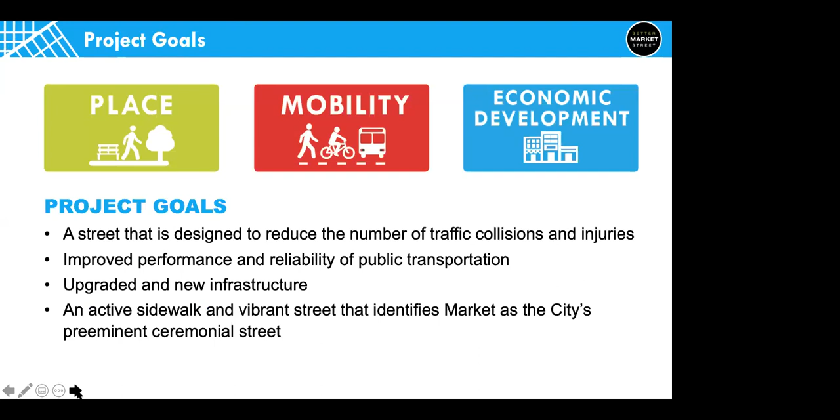Better Market Street is a joint effort between 5 city departments. The San Francisco Public Works is the lead department. Also involved are the San Francisco Municipal Transportation Agency, the San Francisco Public Utilities Commission, Planning Department, and the San Francisco County Transportation Authority. And we work closely with the Mayor's Office on Disability and the Office of Economic and Workforce Development. Better Market Street started 10 years ago in 2010.

Since the project started, we have always had the same goals of improving place, mobility, including safety and accessibility, and to support the economic development of the corridor. Our goals include making a street that is designed to reduce the number of traffic collisions and injuries, to improve the performance and reliability of public transportation, to upgrade and install new infrastructure, and to create an active sidewalk and vibrant street that identifies Market as the city's preeminent ceremonial street.

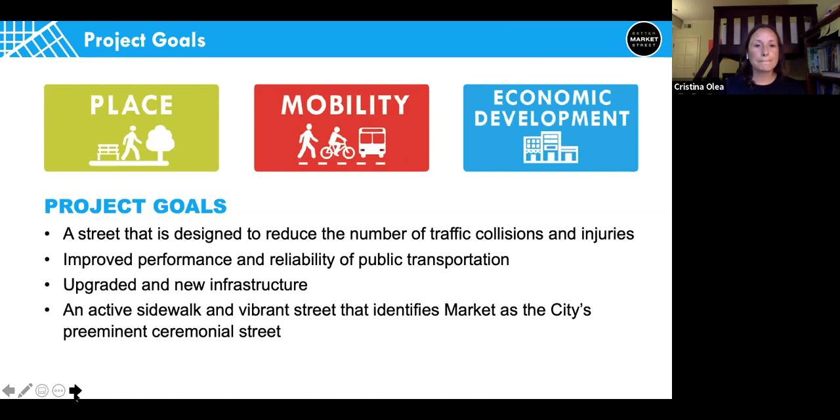In January of 2020, we implemented Quick Build, or as it's also known, Car-Free Market Street. Almost immediately, we saw up to 12% reduction in Muni travel time, and we saw an increase of 25% in the number of people bicycling along the corridor up until shelter-in-place was ordered. This growth in Market Street bicycle volumes made it obvious to us that an 8 foot bikeway would be too narrow and would not provide the necessary capacity from day one.

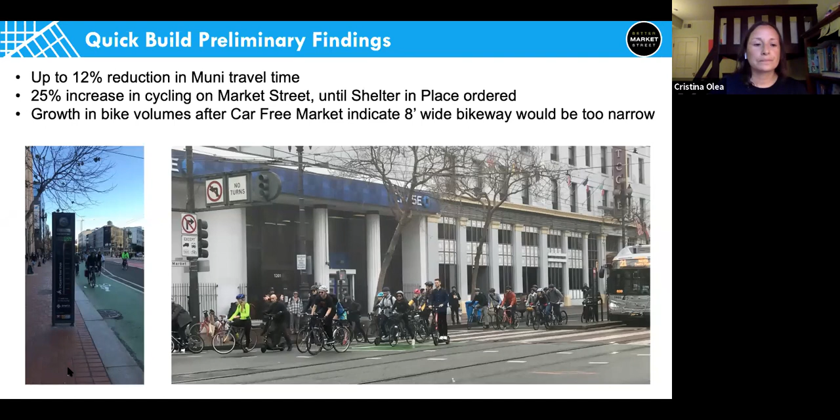Right after Market Street went car-free, or 6 weeks after, the city shut down because of COVID-19, and our businesses were closed. We had to shelter in place, stay at home, and really the city changed quite a bit. The pandemic impacted the economy of the city, but at Market Street especially, as you can see in some of these photos, with businesses boarded up throughout the corridor.

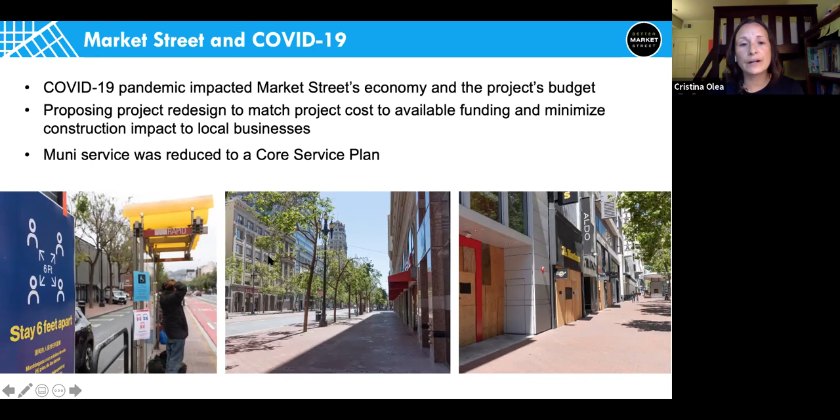This made us look at the project and reevaluate the design to try to match project costs with available funding. And also, even more importantly, to minimize the construction impacts to local businesses and to support their recovery in the next year or several years. We also saw Muni reduced to core service plan, which also changed the way our city moves around. And we want to prepare and support the city's recovery as we move forward.

To support our local businesses, we know that we must minimize the impacts of construction. So you'll notice in this new design, we're keeping the existing curb line as much as possible. We can actually keep it in about 75% of the blocks between 5th and 8th Street. And we will only need to narrow the sidewalk where we have center boarding islands and for one new loading zone.

We will be upgrading and constructing all new curb ramps that meet our latest accessibility standards, but we'll have limited sidewalk replacement, meaning that we won't replace all of the brick sidewalk now. The replacement will be focused around the corners where we're building the new curb ramps. We've also decided to defer replacement of the Path of Gold poles and traction power duct bank, since they still have about 10 to 15 years of their useful life.

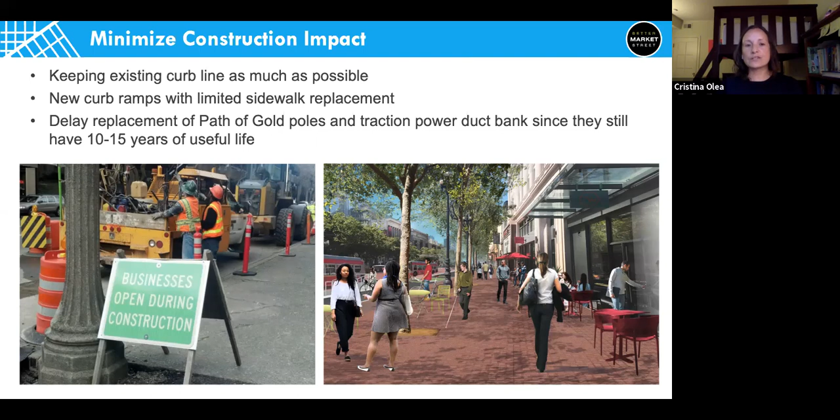So moving into the design changes themselves, this is a rendering at UN Plaza that helps describe the new Better Market Street proposal. Transit will be moving to the center Muni-only lanes. All transit will, not just the F-line. The F-line would remain in the center lanes, but all of the buses would also be moved to the center lane. This means that curbside stops will be removed, and it will eliminate conflicts between buses and bicycles.

Bicycles will stay in the curb lane, which will now be shared with taxis, delivery vehicles, and paratransit. The center boarding islands will be wider and longer, similar to the 2019 proposal, but these center boarding islands will meet all of our current accessibility standards. They'll all have the mini-high platforms for people in wheelchairs to board the F-line trains. And all of the crossings onto the center boarding islands will be at signalized crossings.

You can see in this rendering, the mid-block crosswalk between UN Plaza and 1155 Market, which is the building that houses both Lighthouse for the Blind and the Mayor's Office on Disability. All of the traffic signals will be upgraded. You can see the traffic signals for the mid-block crossing in this rendering.

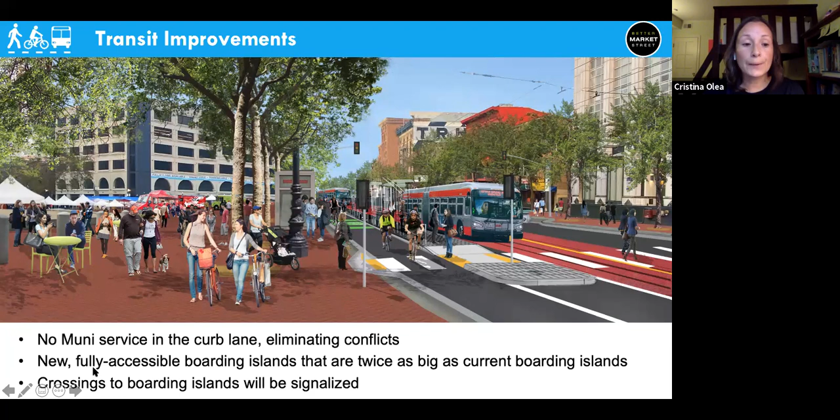Let's talk in more detail about the shared curb lane. As I mentioned, this lane would be for people bicycling or using other micro-mobility devices like scooters. Taxis, delivery vehicles, and paratransit would also use this lane.

We first presented these design changes in September, and early feedback from our key stakeholders included concern that the bike lane was not separated from the Muni-only lane, and a desire to ensure that speeds in the curb lane were low and that we calm traffic.

Since our first presentation, we've added a painted buffer—a 2-foot buffer between the Muni-only lane and the shared curb lane. Within that buffer there will be a raised curb, a mountable raised curb with gaps for drainage, which would discourage anyone in the curb lane from moving into the Muni-only lane, and discourage Muni drivers from entering the shared curb lane.

The third element we've added is a speed table—a wider, flatter speed hump—which helps reduce speeds in the curb lane. It also discourages drivers from using Market Street for through traffic, or from driving onto Market Street at all.

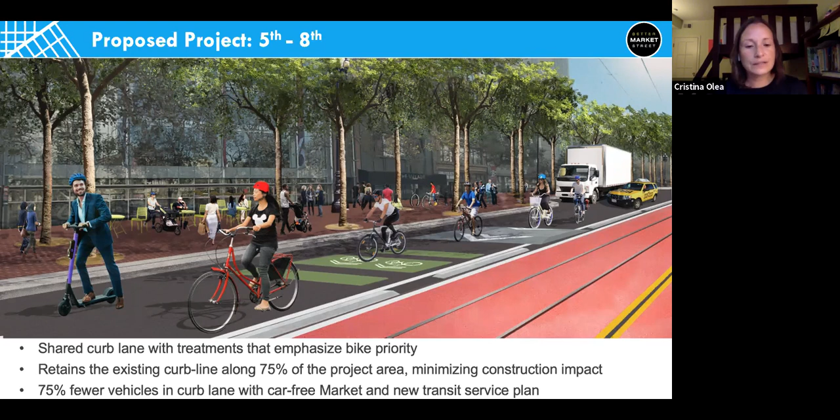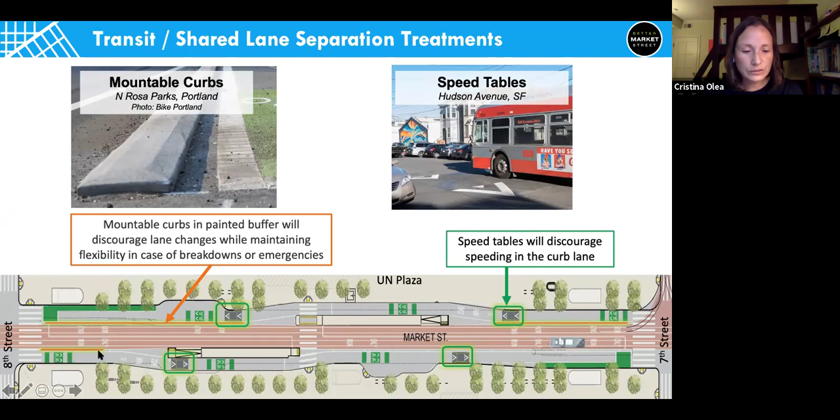This shows a close-up of the raised curb, similar to Rosa Parks in Portland. Here's a picture of a speed table along Hudson Avenue in San Francisco, and on the bottom half is a sample between 7th and 8th Street. We're planning to have 2 speed tables in each direction, with the 2-foot buffer between vehicle lanes and the raised curb.

This rendering is from the perspective of a person walking along the corridor. As mentioned, we'll be constructing all new curb ramps, with limited sidewalk replacement, but we will be replacing all of the bricks at the corners and any broken bricks or gaps throughout the blocks. The center boarding islands will also be expanded to meet our accessibility guidelines.

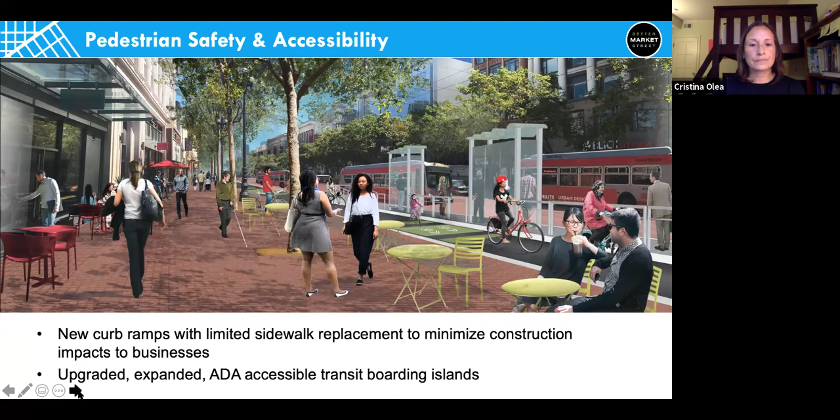This is a comparison of our 2019 to our 2020 design. This is the typical cross section.

In the 2019 design, on the left, we were widening the sidewalk by 2 feet, but then repurposing the first 12 feet of the sidewalk: 4 feet for a buffer, 8 feet for the bike lane, narrowing the sidewalk to 25 feet for people walking or rolling. There were still 2 lanes in each direction, the 11-foot curb lane and a 12-foot Muni-only lane with transit in both lanes. The 2020 design removes the sidewalk level bikeway, which means the sidewalk remains at 35 feet for people walking or rolling only.

Bicycles would use the shared curb lane along with taxis, delivery vehicles, and paratransit. The curb lane is 11 feet wide with a 2-foot buffer between vehicle lanes and then the 12-foot Muni-only lane, which would include the F-line streetcar and all other Muni buses.

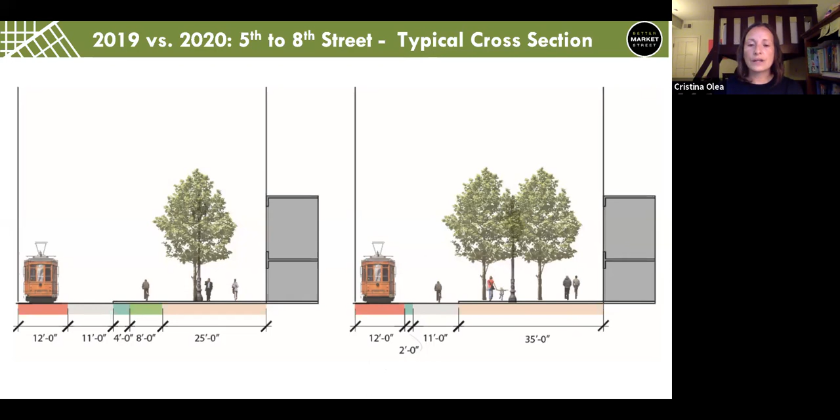This plan view of our 2019 design is meant to show how often the bikeway narrowed. It narrowed wherever we had BART Muni entrances, the BART portals, wherever we had sidewalk level loading zones, and where we had Muni curbside transit stops. So in our typical block between 7th and 8th, you can see portals not just at each end of the block but also mid-block. We had loading zones on both sides of the street and curbside stops on both sides of the street, which left us with only a very little segment in each direction that was actually 8 feet wide.

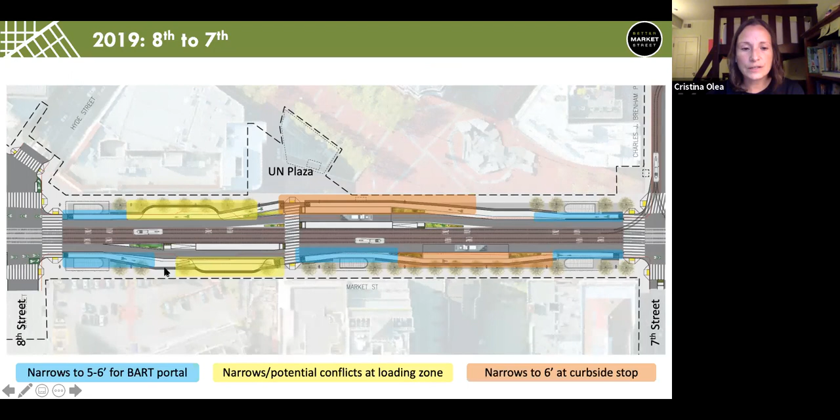I'm going to shift now into our funding plan and project costs. The shaded area in gray covers all of the expenses to date, what we spent in planning and design. We used local funds to cover all of our environmental review and design, including general fund, Octavia land sales, impact fees, and MTA's Prop A Go bond, as well as Prop K, and a little bit of money from BART and PUC also for design.

The redesign effort is estimated to cost $7 million, so we're showing that in its own new column. Our budget for phase 1 construction is $121 million. The largest funding source is MTA's Proposition A general obligation bond, but we also have a little over $18 million in federal funds. We received $15 million from the BUILD program and $3.4 million from a One Bay Area grant. We have $12 million in Prop K funding as well, and PUC will be funding their portion of sewer and water costs using ratepayer funding.

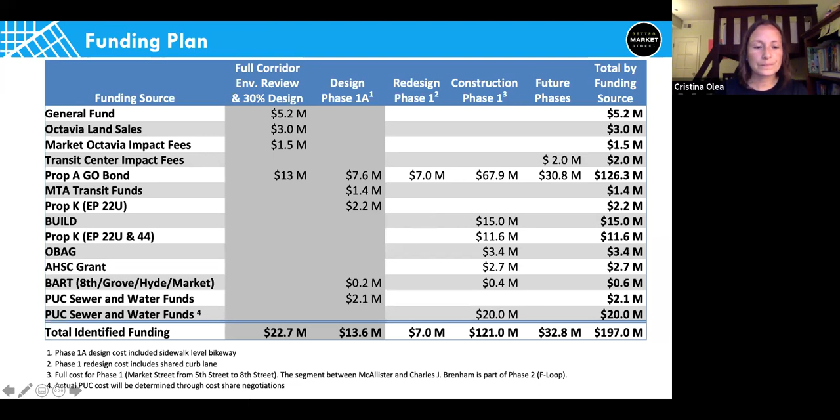This is our comparison of the 2019 and 2020 designs. In 2019, the sidewalk level bikeway, the full reconstruction of the sidewalks, and all of the utility relocation came to $191 million. That includes the cost of construction, contingency, escalation, and soft costs, including construction management and transit support.

Looking at our new shared curb lane design in 2020, our estimate is that the construction contract would be $64.8 million, almost $65 million. A portion of the work, the block along Market Street from McAllister to Charles J. Brenham, will be built in phase 2, which is the F loop. Our estimate for that is almost $10 million. When you add in contingency and escalation, as well as soft costs, plus the redesign effort, you get $128 million.

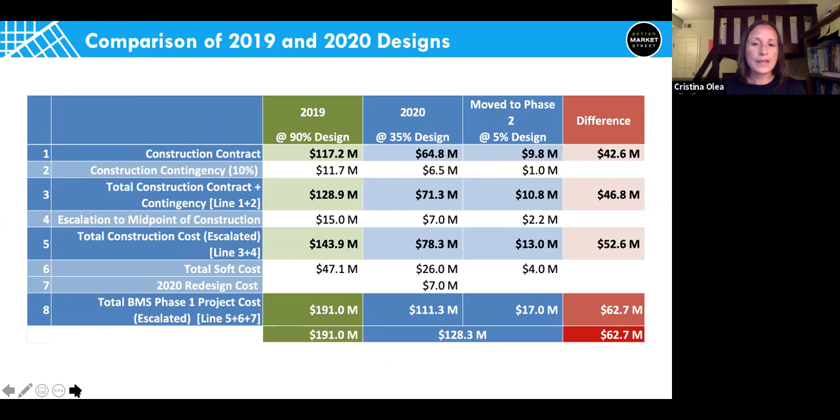So our projected cost savings for this segment is $63 million. But when you project that over the other 4 to 5 segments, we get a much larger savings for Better Market Street. We have heard a lot of questions about why Market Street is still so expensive given the changes in the design, and the costs are broken down here by trade or by scope of work.

The focus of this first construction contract will be the roadway, and a lot of the work will be maintenance or state of good repair work. At the top of the list is replacing the streetcar tracks and the traction power system that feeds the F-line and the trolley buses. We are repaving the roadway and reconstructing the trackway, so that adds in cost. We're leaving the Path of Gold poles but replacing the overhead wires. From the PUC, we have water as well as auxiliary water supply system upgrades.

A few lines down we also have sewer. There's landscape work that comes in around $3 million, a full traffic signal upgrade for the intersections and crossings between 5th and 8th, and some traffic routing and structural work. All of the BART grates will be replaced, and there's site assessment and remediation for our excavation. All of this work is what is driving the cost of the project.

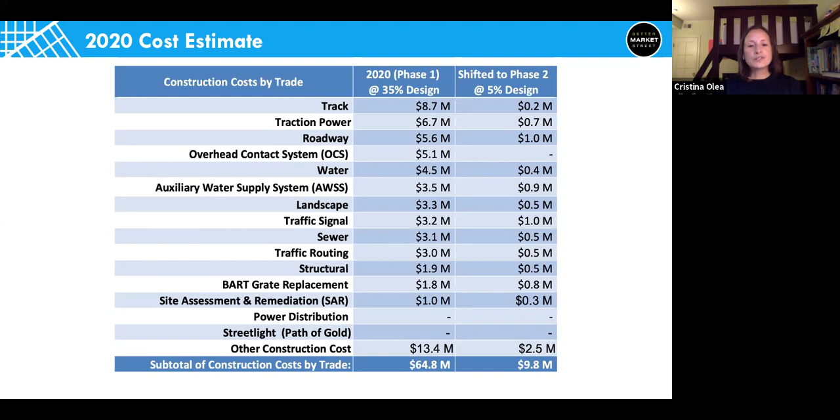Our project schedule hit some big milestones in September. We received our NEPA clearance and we obligated our federal funds.

We just extended our virtual open house to November 30th, so you'll have an extra couple of weeks to view our presentation materials on our website. Today is the last of our online meetings, but we are adding a project survey to the website.

We'll also have a list of frequently asked questions, and our fact sheet is available on our website in not just English, but 6 other languages as well.

Lighthouse for the Blind and the Mayor's Office on Disability will be hosting a public meeting on November 12th, this Thursday, to also make sure that we get input from the blind and low vision community, the disability community as well.

You can see in the project schedule, we are scheduled to start construction in early 2021. Our schedule is to advertise a construction contract in February, and we expect to break ground in summer of 2021. Right now, our estimate is that construction will take about 2 years to complete.

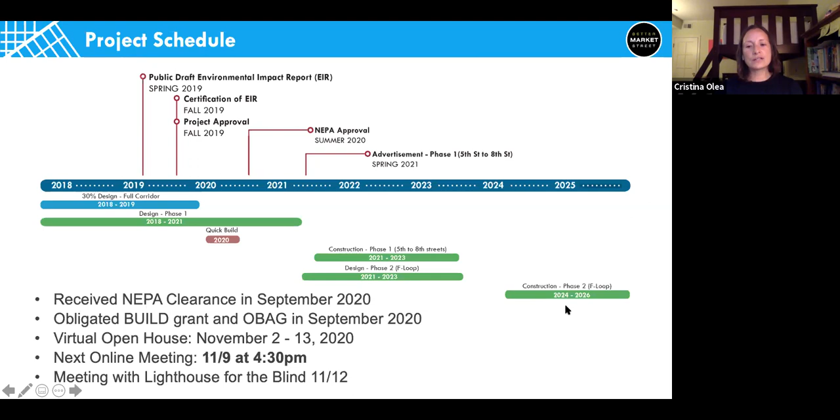At the same time, we'll be designing phase 2, or the F loop, and we expect construction of the F loop to begin by 2024.

So in closing, I just wanted to talk about what's next after 5th to 8th Street. You can see here the construction limits, or the project limits, for phase 2 of the F loop. It's Market Street between McAllister and Charles J. Brenham, as well as the new track along McAllister and Charles J. Brenham.

This F loop allows us to run the streetcars along the loop to service the waterfront where service is needed the most, without reducing service to the Castro. Most likely the operations will be, like every other streetcar would go back and service the waterfront, while the other train would continue on to Castro.

We know that west of 8th Street, we are still planning to implement the hub area design, which has only 1 lane in each direction for Muni only, and then a widening of the sidewalk, or some larger islands to take up the extra roadway space, and to provide a wider protected bike lane.

East of 5th Street, the design hasn't been decided yet. There's still a lot of uncertainty, and we're waiting to hear more details about the transportation recovery plan and what transit operations will look like east of 5th Street. So right now we are narrowing our discussion to 5th to 8th Street, because this is what is funded and what we know we will be building next.

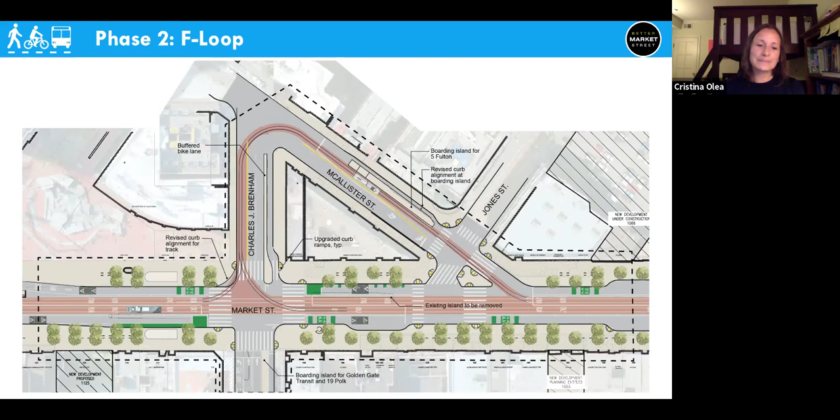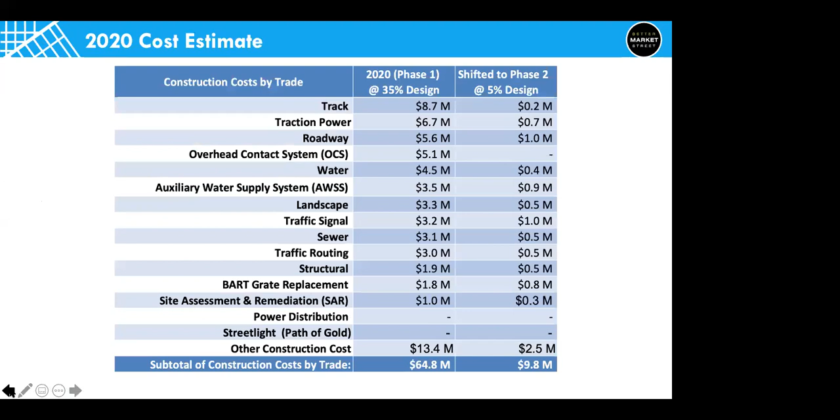Just imagine biking alone at night in the dark with a taxi driver revving down your neck. We need turn barriers every 2 blocks on this street. I'm talking physical barriers that if you crash a car into it, it stops you dead cold. Now we need taxi drivers to think of Market as a cul-de-sac, something you only access for drop-offs.

I would recommend automated bollards, like the ones you find in Europe. They can be lowered by emergency vehicles, or for city parades, or in situations when the F breaks down and Muni needs to use the curb lane.

I want to see better solutions from this team. The safety of people walking and biking, and even crossing from the transit islands, has been completely ignored from this project. Thanks for your time, and I will continue to work to actually make this a better Market Street.

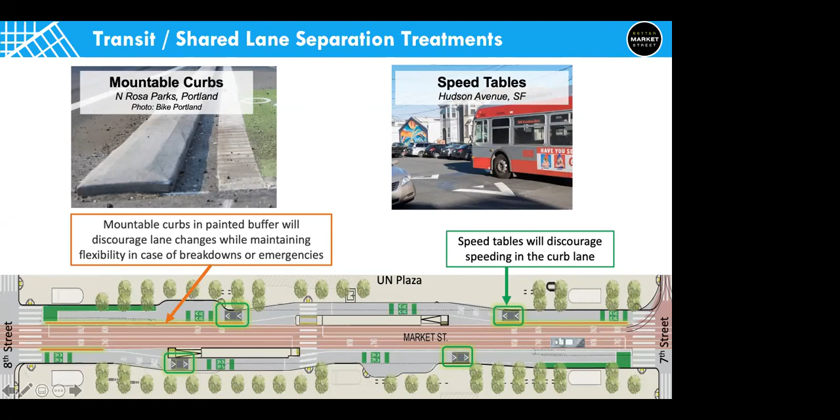We will now go to a Q&A question. This is an anonymously submitted question: Without the raised cycleway, how will the Market Street you're proposing be any safer for cyclists than what is currently in existence?

So the proposed design is focused around a few key safety improvements. One is reducing the number of vehicles that would be using the curb lane. We've already restricted all private vehicles, including Uber and Lyft. Transit vehicles are moving to the center lane. So the only vehicles left are taxis, delivery vehicles, and paratransit, which are just 25% of the existing traffic volumes.

And I think it was Paul who mentioned delivery times, and that's an important point I didn't mention in my presentation: delivery vehicles are prohibited from making deliveries in the peak direction during peak hours, so inbound in the morning and outbound in the afternoon. So bicycles will get more space than they did in the previous 2019 design, and there will be 75% fewer vehicles in the curb lane.